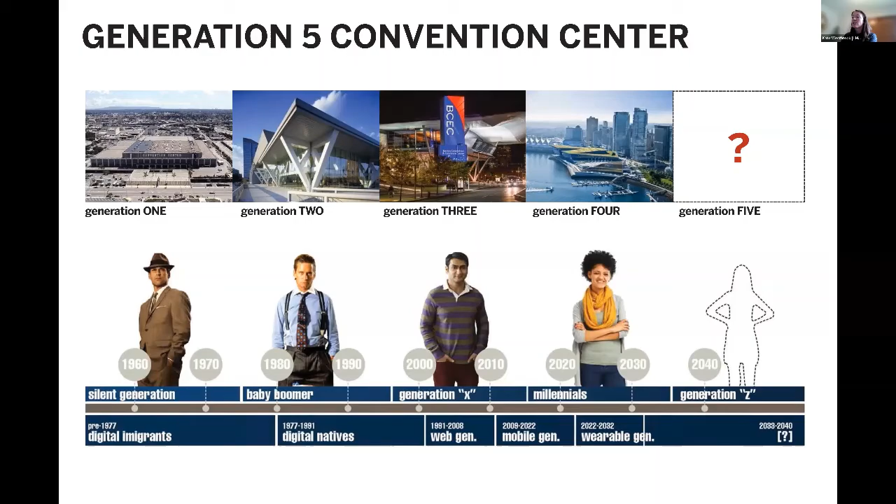So the location of the new building, which you've probably seen, is the old transportation center right on Pine Street and Boren Avenue, adjacent to I-5. It's at this really interesting crux in the city where we're touching and engaging with all of these different neighborhoods. To the north, we have a lot of new development in Denny Triangle and South Lake Union. We're connected to Capitol Hill right across the highway, First Hill, the retail core, and we have these major street thoroughfares that connect us down to Pike Place Market and all the way up through Capitol Hill.

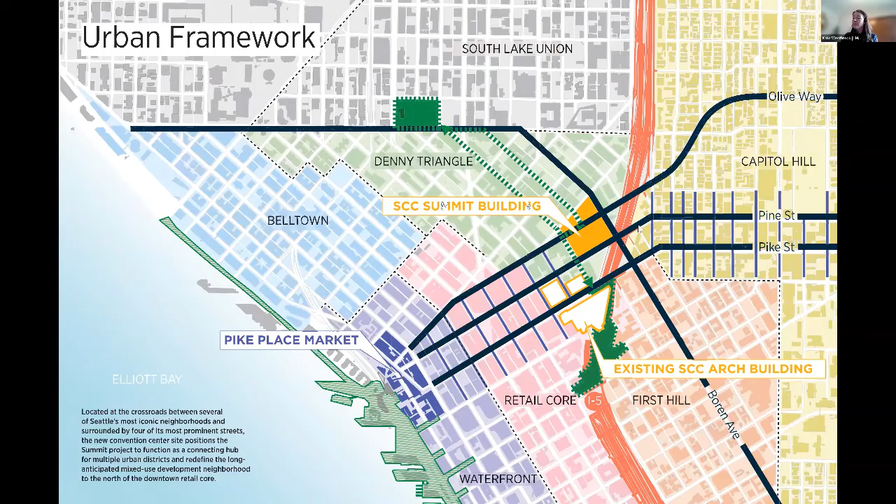That's sort of the first layer of investigation when you look at a site, but we also looked at all of these other layers of what makes up the city in this region, and what are the elements we should think about engaging with architecturally.

One of the big ideas that we had is this: our site is located right along I-5, which historically, when I-5 was built, cut a rift through the city. One of our goals was to actually use this project as an opportunity to help knit the two sides of I-5 back together, and really make an enhanced pedestrian connection and experience for people who are visiting either Capitol Hill or downtown, so that they're walking across and engaging with the convention center, and not walking across what feels like a very big void in the city right now. So that was one of our big goals.

This diagram shows where the existing convention center is currently, what is now called the Arch Building. This new project takes up 4 city blocks. It's 1 block away from the existing convention center.

The two are meant to work together so that you can host events simultaneously in both buildings, or events can be off-phased, so that while one convention is setting up or doing takedown in one building, the other building can be hosting and operating a convention at the same time. This starts to even out some of the ebbs and flows we see in tourist and hotel occupancies, giving a more even flow commercially to the downtown core and to a lot of the retail and hotel outlets.

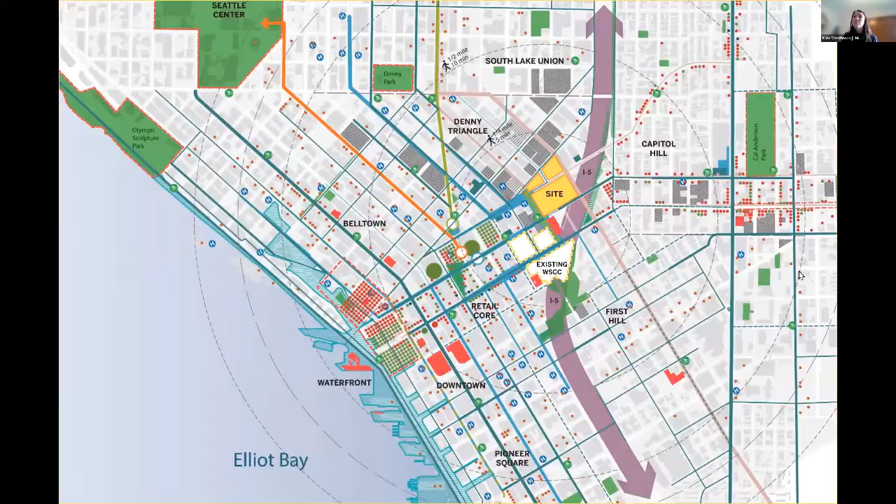Because we have a very constrained site in the middle of the city, our first challenge with this new convention center is that we only had 4 blocks to work with. Two of those are triangular blocks where we're proposing co-development towers - one office building and one residential tower. That leaves us 2 city blocks to build a really amazing new and larger convention center than what the existing one can offer.

So the first challenge was to think about this in a new way, not as a single-story sprawling convention center, but truly a vertically oriented and stacked convention center. We have 3 major assembly spaces: the exhibit hall in the basement, what we call the flex hall in the middle of the building, and the ballroom at the very top level. These graduate from being the most utilitarian in the exhibit space to a really refined, beautiful space where you can host dinners, events, and speakers up at the ballroom. There's also 2 levels of meeting spaces, and a level at grade with our main lobby, retail space, and integrated parking.

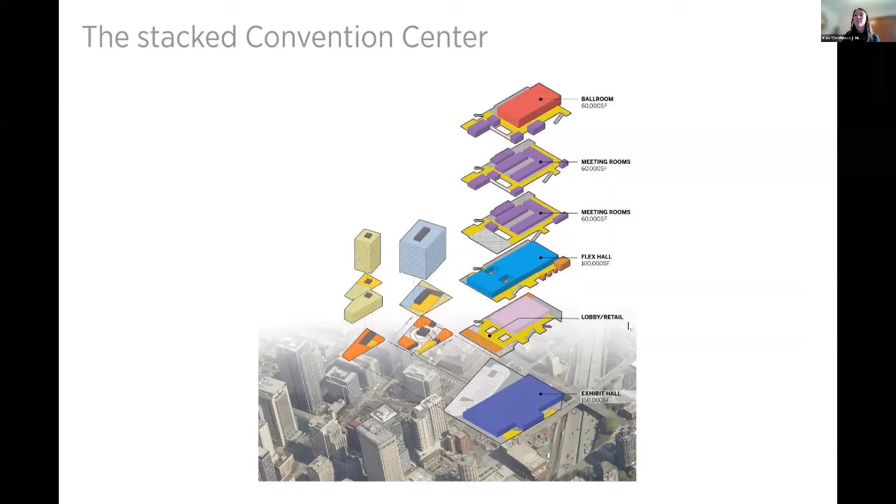This is a section through the building. You can see this exhibit hall below grade - 150,000 square feet of exhibit space. This will really allow the convention center to bring in larger events than has been possible in the past. The parking is located between exhibit and flex, and then we have our meeting rooms and the ballroom on top.

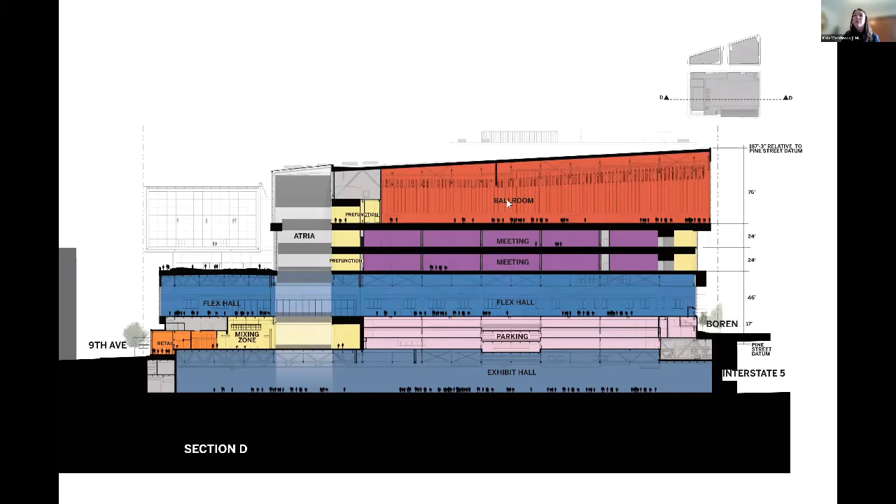In terms of sustainability, there were a lot of goals for this project, and we were able to integrate quite a few of them into our strategy. In terms of LEED certification, we're targeting LEED Platinum, but we expect to at least get LEED Gold, if not Platinum. It's a salmon safe certified building. There's a wide array of additional measures we've been targeting. We have a 30% energy use reduction, part of that from the design of the mechanical system and the heating and cooling for the building. It has a really great dedicated outdoor air ventilation system.

We also have a 50% potable water use reduction. Part of how we're achieving that is collecting rainwater from this really expansive roof and reusing it for toilet flushing within the building, which is a really great saving to accomplish. We're also using a lot of materials that we call red list free, or PVC free, and using some reclaimed, natural, and local resources as well - I'll explain a bit about some of our ceiling elements.

We have photovoltaic arrays on the roof and extensive green roof terraces and planting all the way around the building.

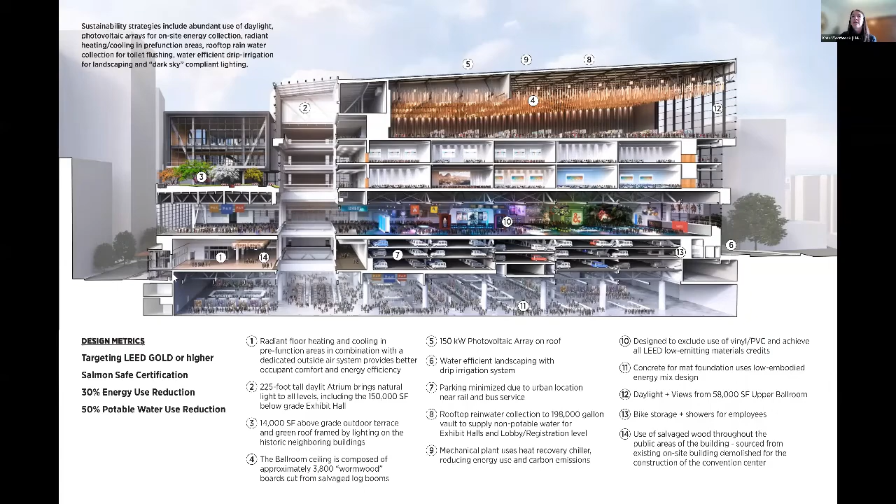In addition to sustainability, we've also been thinking about public benefits, and there's an extensive public benefit package that went along with this project. It was focused primarily on the adjacent neighborhood and zone we've been working with around the convention center, but some of the public benefits stretch further into the community. Some of those items: we have an extensive public art program, so there'll be 20 new permanent public artworks integrated into the new building design, Olive Way and Pike Pine street and pedestrian improvements, and historic building lighting enhancing the Camlin Hotel and the Paramount Theater adjacent to our site.

The project is funding freeway park improvements as well as the LID I-5 study that you may have seen, and in addition there's a bicycle master plan. For the construction site, there's a worker training and apprenticeship program, project labor agreements, and additional funding for affordable housing.

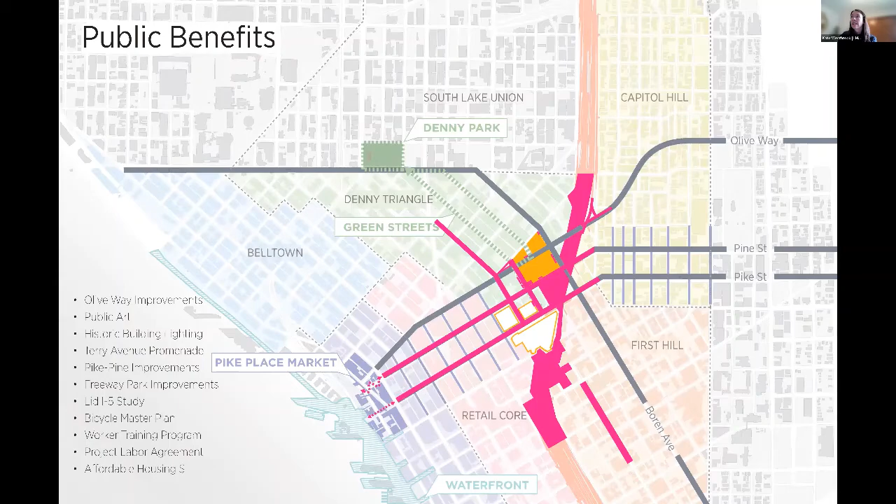So now I will talk a little bit more about the architectural expression and concept. One of the big things we thought about is that we wanted the convention center to really help promote engagement between the city and our local residents and communities and what's happening inside the convention center.

So what we did is we thought about the building as a very simple framework that can both use the city as a backdrop for special events and conventions happening in the building, but also give the locals and the city an opportunity to peek into the convention center and see what's happening, because there's a lot of fun and exciting events people don't often see. I'm sure you've noticed when there's Comic-Con or events like that, people spill out into the streets and bring their community with them.

So we wanted to create a framework that was very clean, very simple, and really let the conventions take over and express themselves through the building. Our material palette is simply a lot of glazing, some simple metal panels, and then warm wood touches as well as vegetation.

While I showed you that section, which makes the building look very cleanly stacked from top to bottom like a pancake, it's actually a much more complicated architectural expression when you break it down and look at all the items and programs that intersect one another. So we had this sense that the building is comprised of all these pieces that come together to create an urban collage, expressing the functions of the building but also responding to the city context and the engagement with historic buildings adjacent to us, such as the Camlin and the Paramount.

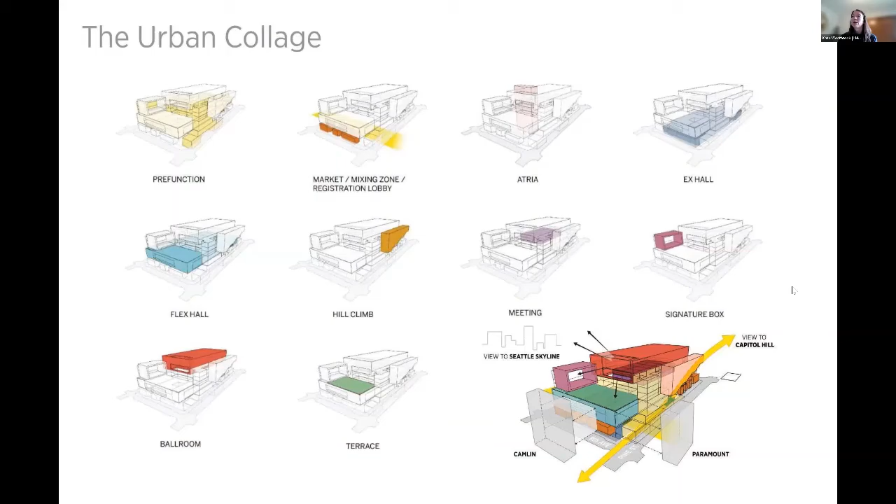I'll talk through one of the main features, which we call the hill climb. This is a really beautiful feature stair that's going to be located along Pine Street. You've probably noticed it driving down I-5, or if you're going down Boren, you can see it well. One of the goals here was thinking about that connection between Capitol Hill and downtown and bridging that gap over I-5.

So this hill climb functions as a place where users can sit and socialize. It's a moment of connection and interaction, but it also provides fantastic views out to the city and surrounding context. Below it, for pedestrians, there's an additional different scale of interaction where we have retail - 4 small retail zones - to provide additional resources and pick up that texture and scale of the Capitol Hill neighborhood leading across I-5.

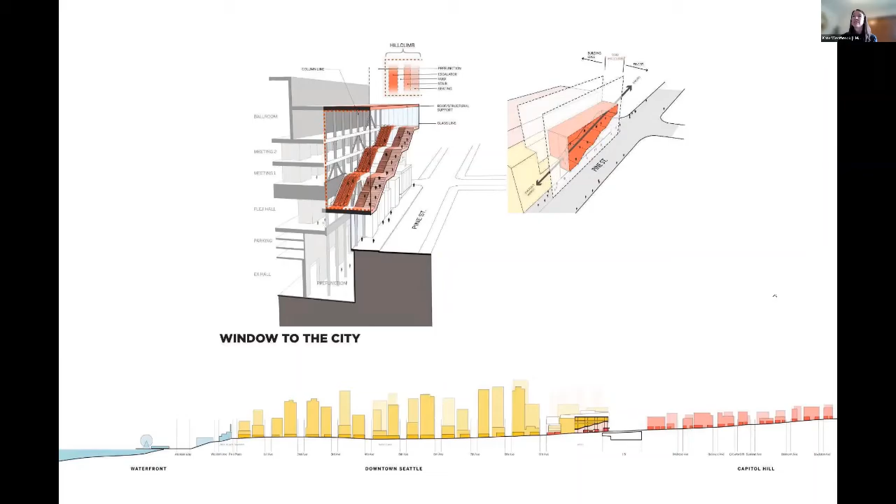So this is a rendering we made to help describe what the goals were in this design element. This is the hill climb you see here - it's the main vertical circulation for the building as well as a social experience. These are the retail spaces down below, and you can see the convention center is very glassy and transparent.

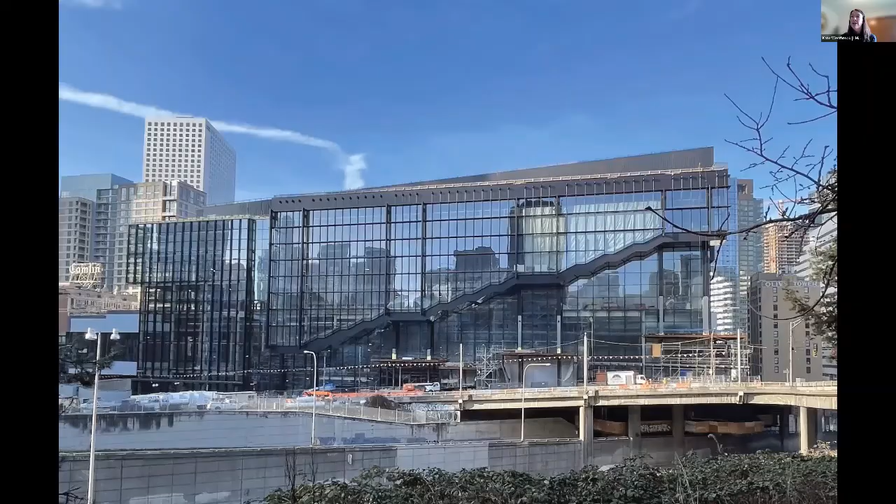This photo was taken probably a few weeks or a month ago, and you can see what that expression is starting to be materialized as. Of course, the lights are all off on the inside, so you can't quite see through the glass in the photo, but when lights are on, you'll really be able to have that sense of transparency.

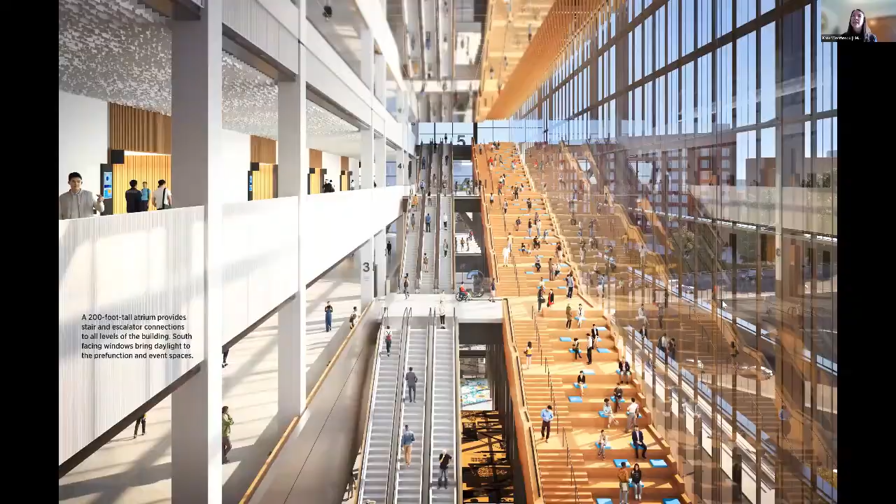This is a rendering of the interior. You can see our main vertical circulation and then this really amazing social stair, all covered in wood, so that it's a really warm and inviting place to spend time and hang out.

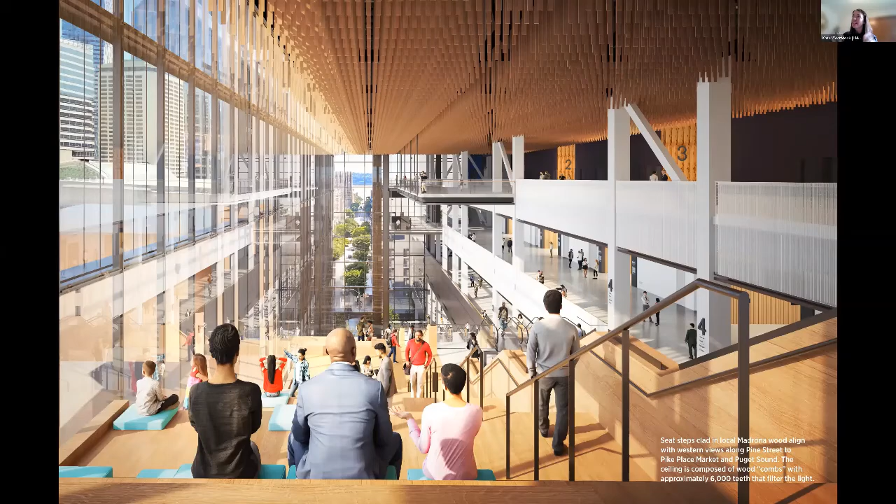This is the view that the hill climb provides all the way back down Pine Street. You can actually see the water there and the Pike Place Market sign. It'll be a pretty grand experience, I think, as a visitor. There's a specialty ceiling made up of wood comb elements that bring some warmth to that space and provide a visual connection to our local forest products industry.

This view is looking down Pine Street as well, and you can start to see that top level ballroom space. The other thing to note is that the underside of the hill climb is a reflective mirrored soffit, which creates the opportunity for some fun engagement with pedestrians.

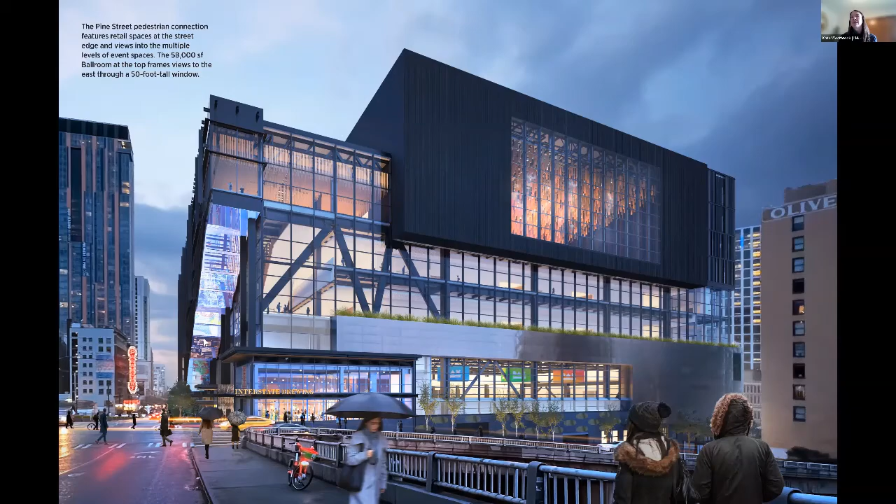On these retail spaces, there's also some integrated artworks that are going to be printed permanently onto the metal panels that wrap the retail spaces. So you'll be able to see the artworks on the rooftop of these spaces in the mirrored soffit as you walk down Pine Street.

Within the ballroom, this is a really fantastic space. It's about 60,000 square feet of occupiable meeting space. We designed a really fun ceiling installation, using a wonderful product that's local to our region and industry called wormwood boards. These are cuts made from a log boom that's been sitting in the water, used in the timber industry. The dark marks are actually holes bored by little organisms that live in the boards, creating a really interesting and beautiful texture to the wood itself.

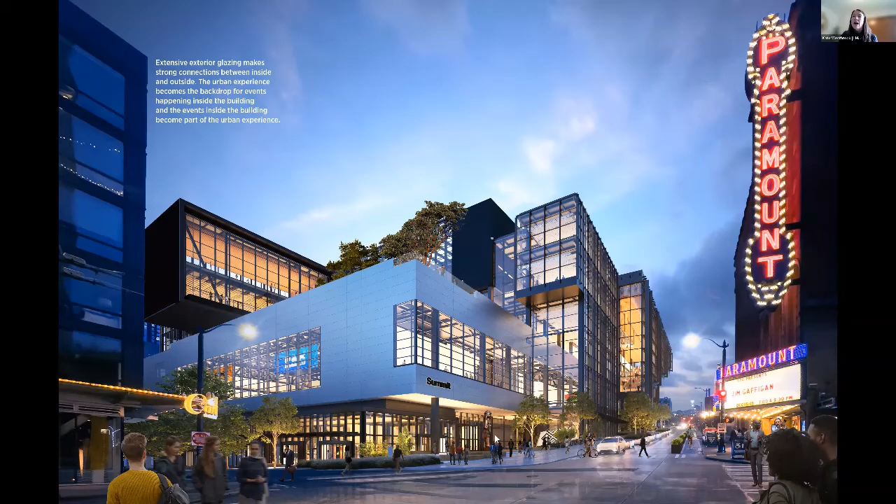This view is the main entrance on Pine Street. We have a plaza set back from the sidewalk. It will also house about 8 different public artworks designed by a group of 5 Indigenous women artists who worked together on both this entrance and the Olive Way entrance. They each represent different local tribes to our region, and it's going to be a really fantastic experience. You should look out for that when the building's complete and the artworks are installed—they're going to be really exciting and fantastic.

You can also see this is the flex hall here, another large assembly space. Above that we have a roof terrace, with the building set back on both sides. Part of this move to set the building back from the corner was to give some space to the Paramount Hotel, the Paramount Theater, and the Camlin Hotel, respecting the historic buildings on the corner of our site.

Within the building and adjacent to that terrace, we also have a very tall and large atrium that connects all levels of the building. It's over 200 feet tall. The goal with this atrium was not only to provide visual connection between the levels of the building, so you have a sense of where you are in space—when you're on a meeting level you can look down into the flex hall and see what events are happening there—but it also brings natural light all the way down to the exhibition hall, which is below grade.

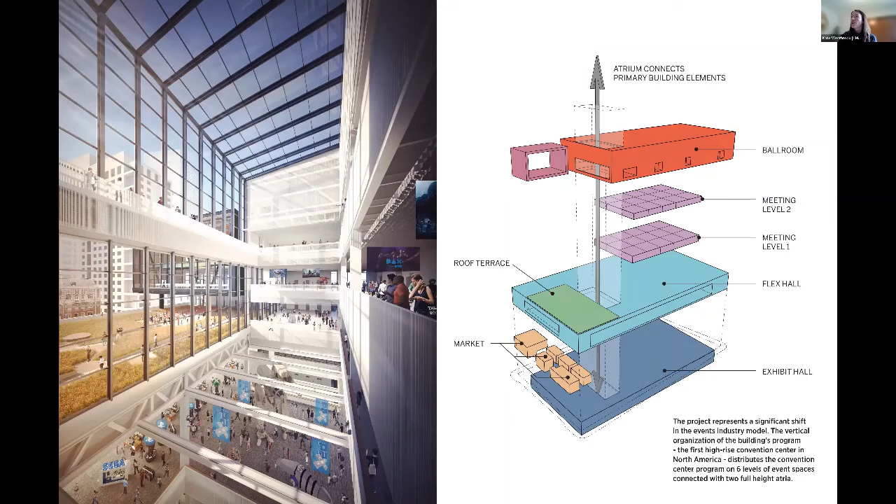This is a view of the other side of the main lobby, looking back towards the Paramount Theater. We're on Olive Way. There'll be an entrance on both sides so we can welcome people both from the Denny Triangle side of the project and also from First Hill and Capitol Hill.

Additionally, in this view there are a series of hanging planters on the wall, which will be a very cool feature. These planters were designed to mark the termination of Terry Green Street right at our project, so we took that idea of a green street and wrapped it up the building vertically. These are actually going to be quite large, with small trees hanging up along the wall.

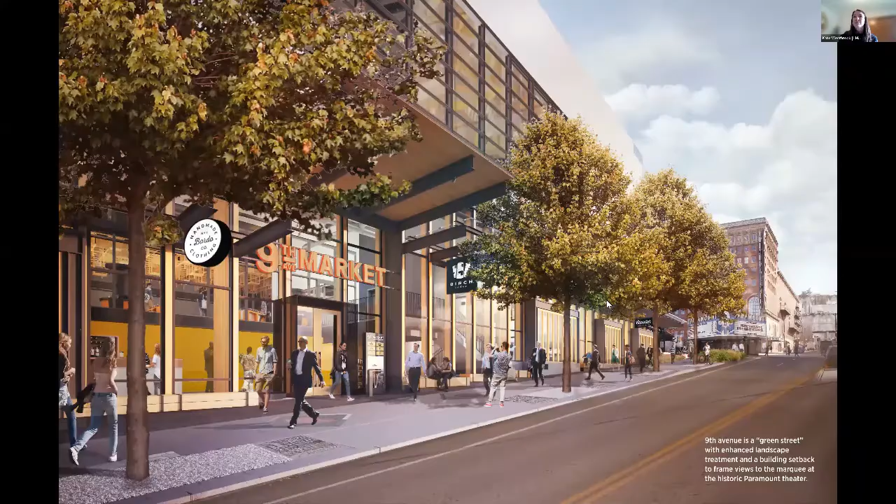On 9th Avenue, we have what we call the 9th Avenue Market. This is designed to be open to the public and an amenity to the whole neighborhood. There's going to be retail and restaurants located in this space all along 9th Avenue, connected to the publicly accessible lobby.

You can see that in this rendering here, right on the corner—this is that plaza I was talking about a few minutes ago with the native artworks integrated. Now I'll talk really quickly about some interior materials. The concept for the interiors is to really think about warmth, materials, craft, local resources, and light.

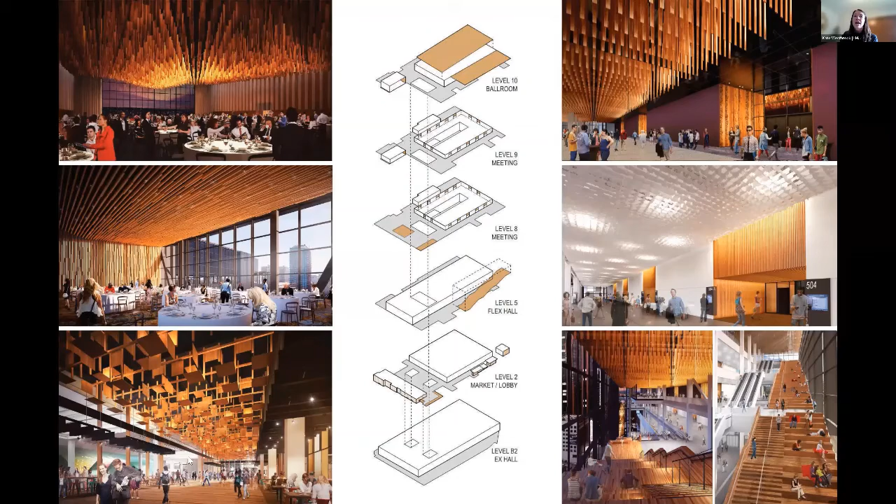There's a series of specialty ceilings throughout the building, all constructed with different types of wood. I spoke a little about the ballroom ceiling and the hill climb ceiling with those cones. We have some additional specialty ceilings—this one is at the main public lobby. It's designed as a chandelier, lighting the space, but we also had an artist work with us to design integrated panels within the lighting so they would cast shadows onto the floor of the main lobby.

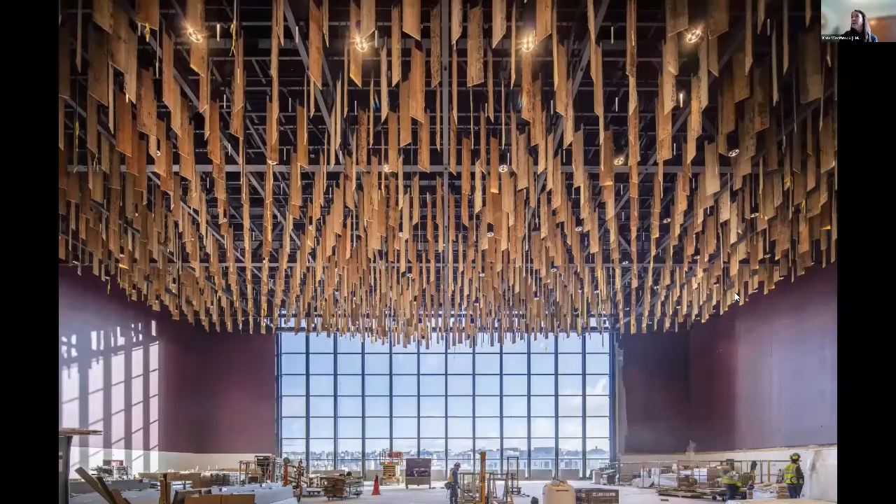The concept the artist came up with for those shadows was to evoke the feeling of walking through the forest, the way light becomes dappled through the tree canopy. So she designed perforated patterns that we fabricated ourselves and are hanging up in the public lobby. You'll be able to visit and see those.

This is a view of the interior ballroom—pretty recent, still under construction. There's a 50-foot glass wall at the end of the building, so you can see out to Capitol Hill and have that visual connection to the community. You can also see all of these wormwood boards hanging in the ceiling, creating a warmth and interest to the space.

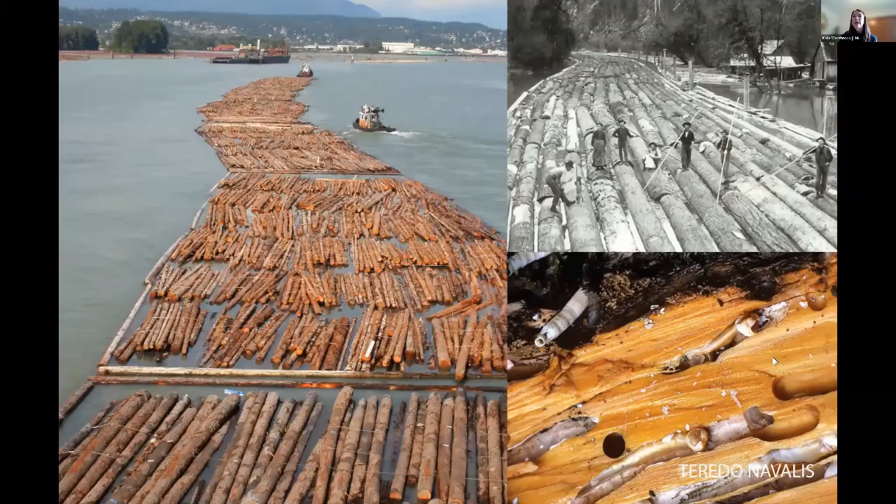This is an example of what the boards were sourced from—log booms that helped corral timbers as they moved down and through the Puget Sound and the rivers. We sourced these locally and then milled them in order to get that board to hang in the ceiling.

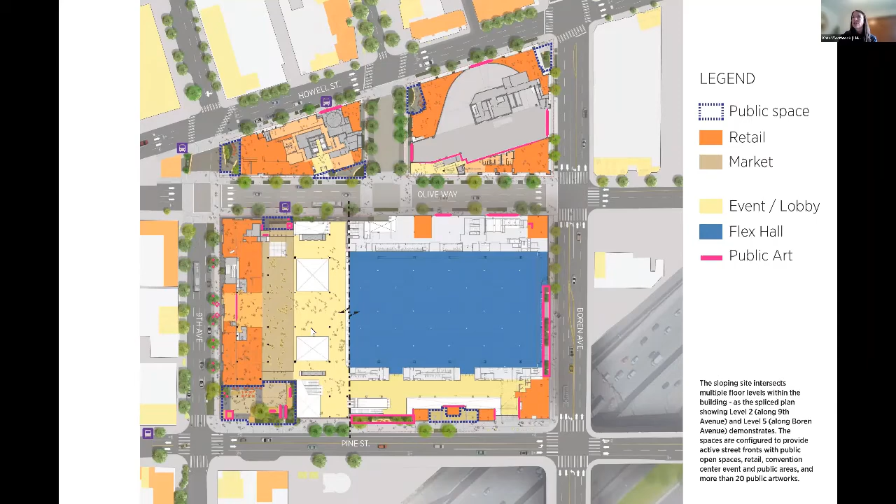And I'm going to wrap up there, and I'll close by saying the other goal of this project was to create a really engaging public space on every side of the building. This is a combined floor plan because our building engages streets that are sloping, but we really strove to locate retail and active public engagement on every side of the building. All of the retail is in orange, on both the main convention center building and the co-development, and the public artworks are located in hot pink. We have more than 20 public artworks that will be permanently installed and integrated into the architecture. So I'll stop there and welcome any questions and comments.